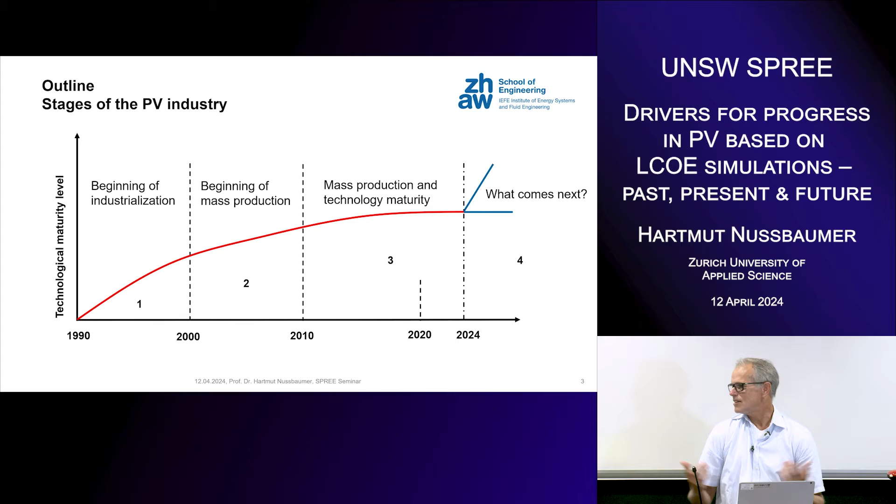I start from a retro perspective, and then I take a look into the future. For this, you see my outline. I divided the time into 4 different periods. The first period was in the 90s, when I was starting my career in photovoltaics also - that was the time of the beginning of industrialization. Then the next decade, from 2000 to 2010, was the beginning of mass production, later followed by a period which I name mass production and technology maturity. And the question is, of course, what comes next? Is it a disruptive change, or what will we see? We will discuss it.

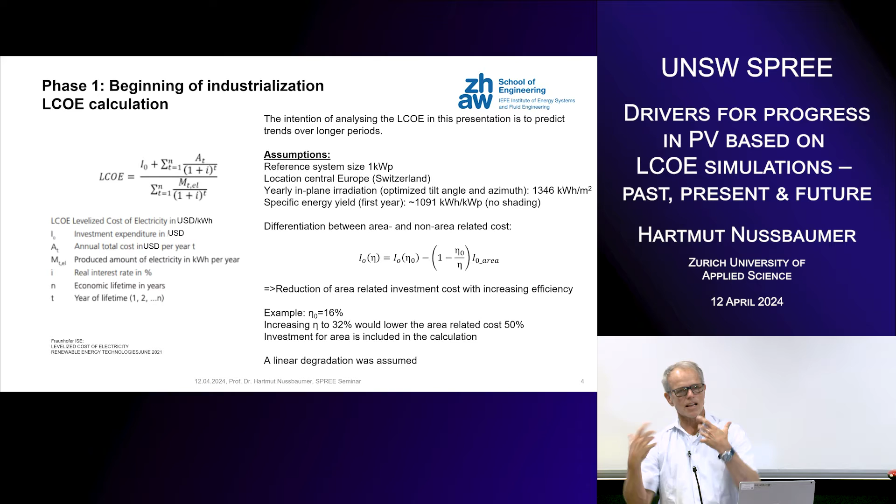So the levelized cost of energy, how I calculated it, is using just the standard formula, where you sum up all the costs of your photovoltaic system during the lifetime, divided by the total energy yield over the lifetime of the system. The yearly cost in the future is discounted by an interest rate, as well as the energy yields in the future, which are also discounted by an interest rate. That comes from the thinking that electricity has a kind of monetary value, which is discounted in the future.

I would like to mention that my intention here is to use this tool to predict trends over longer periods. So it's not the intention to predict the most precise levelized cost of energy for a certain time, for a certain location or so. That is not my objective here.

For this reason, I took some assumptions. I take a reference system, 1 kilowatt peak size, just for reference, location Central Europe, Switzerland, with a yearly in-plane irradiation of 1,346 kilowatt hours per meter square, giving a specific energy yield of 1,091 kilowatt hours per kilowatt peak, which relates to south-facing modules in central Switzerland.

Then I differentiated between area and non-area related costs, in order to reduce the cost when the efficiency is increasing. So if the efficiency of the modules increases, I need less area, less subconstruction and so on. This is shown in this formula here I've used. Just an example, if I would have a cell efficiency of 16% and I would increase it to 32%, that will decrease the area related cost by 50%.

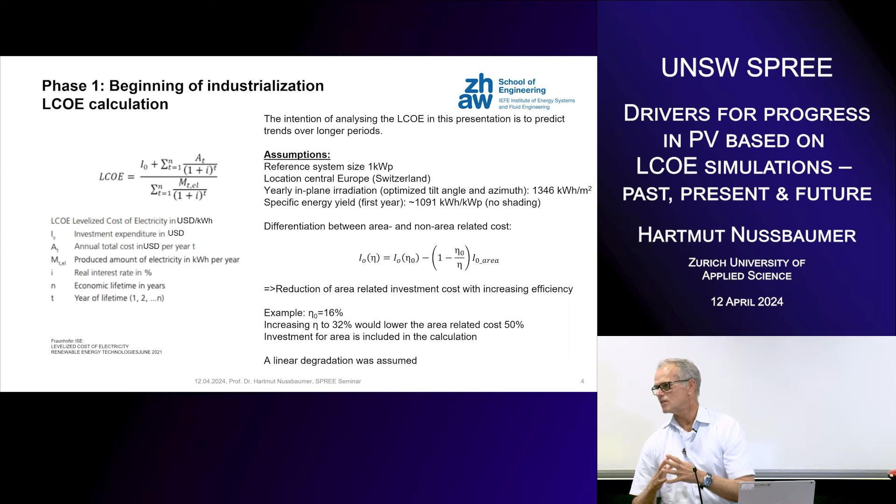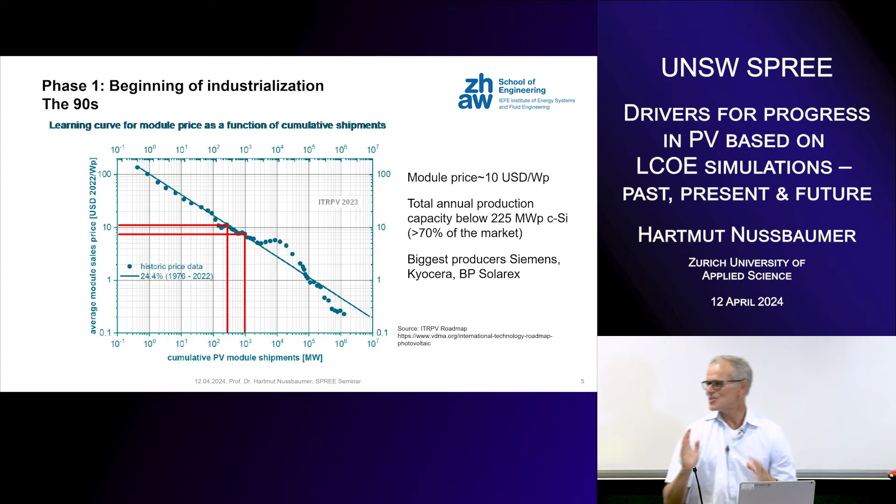So totally different to what we have now. The total annual production at that time was 225 megawatt for crystalline silicon, representing about 70% of the market. The biggest players were like Siemens, Kyocera, BP Solarex, and so on - all around 30 megawatt at the end of this time period. I myself was working at Eurosolare, one of the biggest players at that time, and it was like 6 megawatt per year output. So just to get a feeling, it's a totally different story.

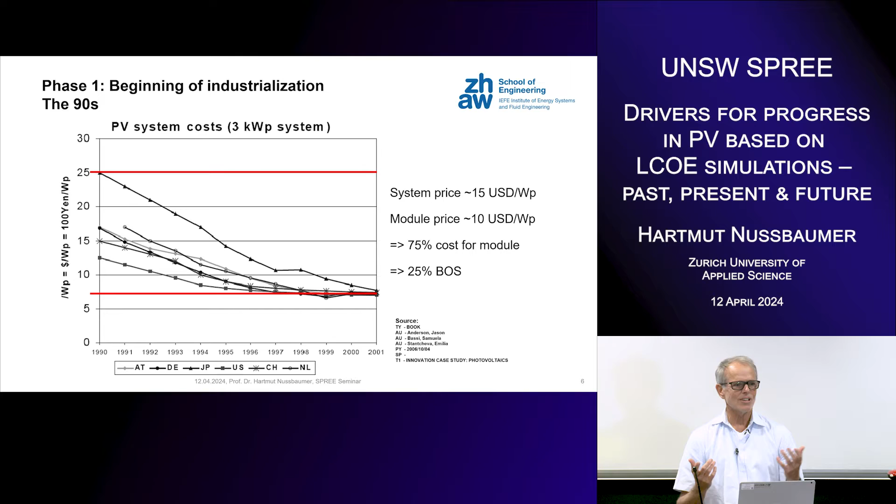And then I wanted to see what kind of system costs we had at that time. I found a publication on that. Of course, during this decade there is a huge variation in price, but I took an average of $15 per watt peak, taking into account this $10 per watt peak for the module. So that would represent like 75% for the module and 25% for the balance of system for the rest of the system.

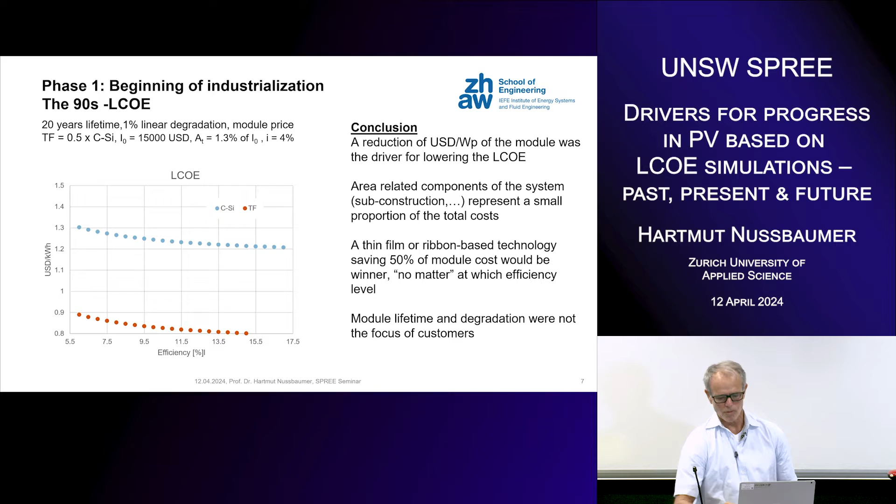They were really a small part. So a thin film technology reducing the price by 50% in US dollar per watt peak, no matter what efficiency, I would say it would be a breakthrough at that time. Module lifetime and degradation was not very much a focus for customers at that time. If we just look back, what was the technology at that time?

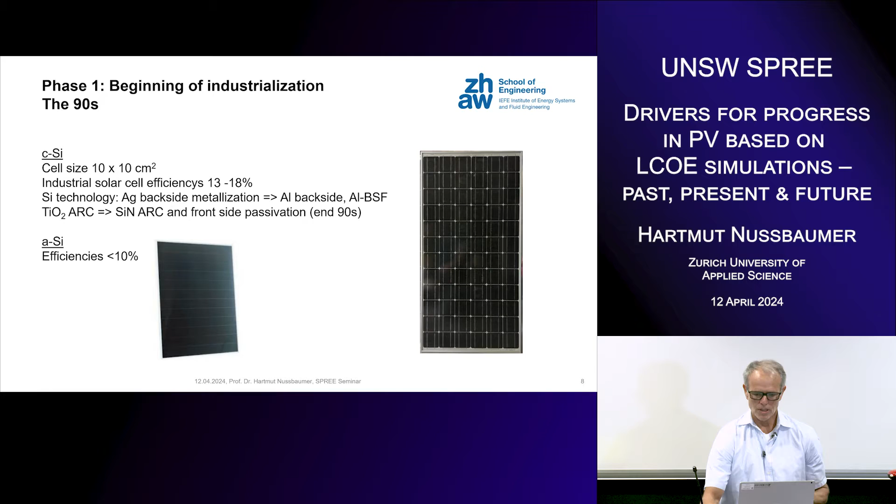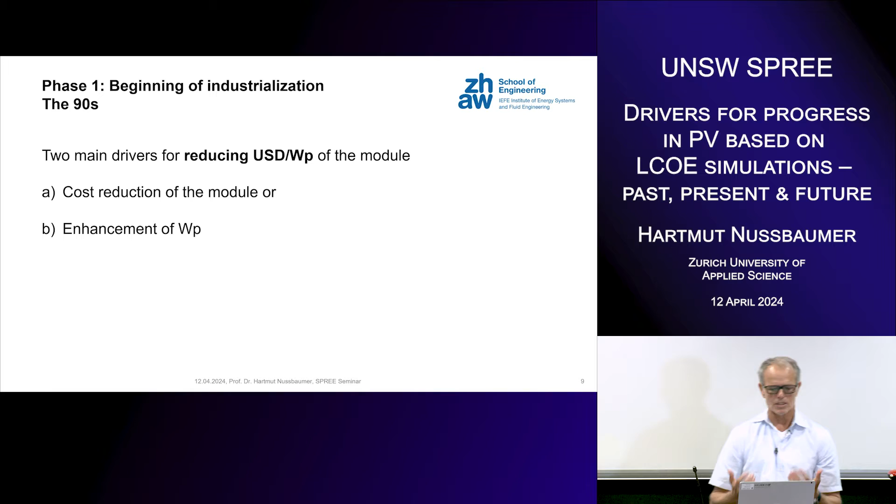And then for the amorphous silicon technology, that was still far below 10%. So that was the situation. The major focus was US dollar per watt peak needs to be decreased - that was the main goal. So we have two possibilities: cost reduction or enhancement of the power output, increasing efficiency respectively. So what were the topics then?

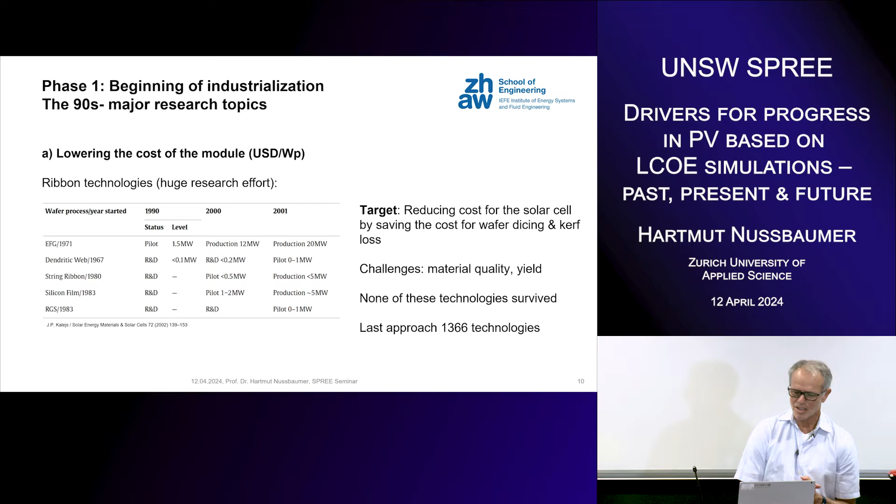There was a huge effort in the 90s for these kind of ribbon technologies. No one remembers it anymore. It's clear, we make monocrystalline silicon ribbons - nobody talks about ribbons anymore. But that was a huge thing at that time, because substituting the costly wafer with a ribbon would drastically reduce the cost. There was all these kinds of technology - EFG, dendritic web, and all kinds of things. And the challenge was always material quality, yield, and at the end, as we know, none of these technologies survived. The last approach was the technology from 1366, which I was in contact with them, but even they disappeared with this kind of approach.

Also, technology-wise, there was a change from titanium dioxide to silicon nitride. Hydrogen passivation was a big step. There was discussion about direct plasma versus remote plasma, and the fight between Centrotherm and Roth & Rau. Aluminum back surface field was optimized with the pastes, and some pastes were always better than others.

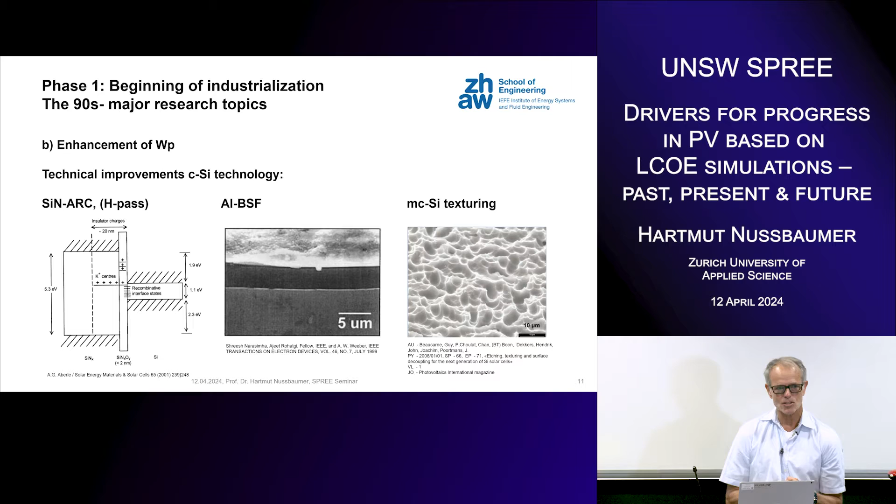I think a big step towards multicrystalline silicon was the availability of a texturing process based on acidic texturing. That was a real push for the multicrystalline technology.

Even in the 90s, there were already advanced technologies like the buried contact solar cell, invented by Stuart Wenham and Martin Green in the 80s here at the University of New South Wales. Great technology—they even used copper contacts at that time.

The modules performed great in the field. They used a heavy diffusion for these buried contacts in order to prevent the diffusion of copper into the silicon, and also LPCVD anti-reflective coating, which resulted in production efficiencies above 18%. It was produced by BP Solar and later BP Solarex with the Saturn solar cell.

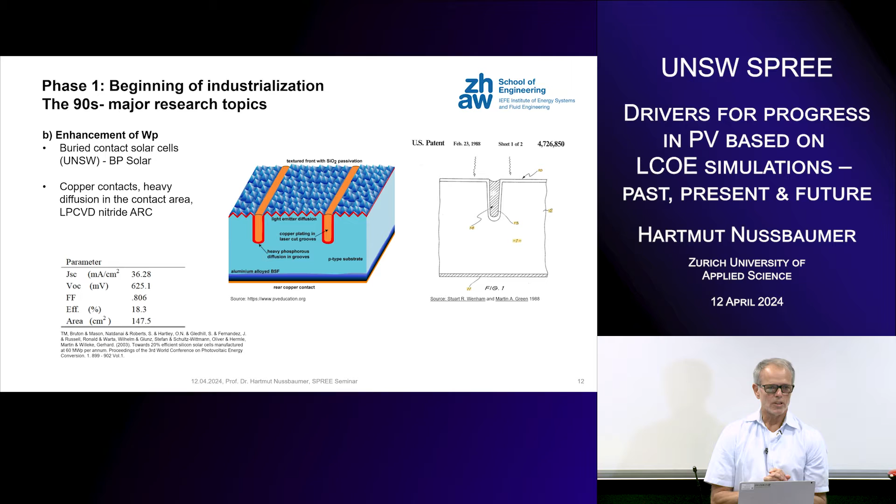Very nice thing. Then coming to the next decade, there was again a huge drop in the levelized cost of energy and in the module price, from $7 US to below $1 per watt peak. For my calculations, I used a price for the crystalline silicon system of 4,000 to 5,000 US dollars.

And for thin film, 3,000 — I really made a big step again for thin film to see what that means. I used for the annual cost 1% of the total investment costs, an interest rate of 4%, and a yearly degradation of 1%.

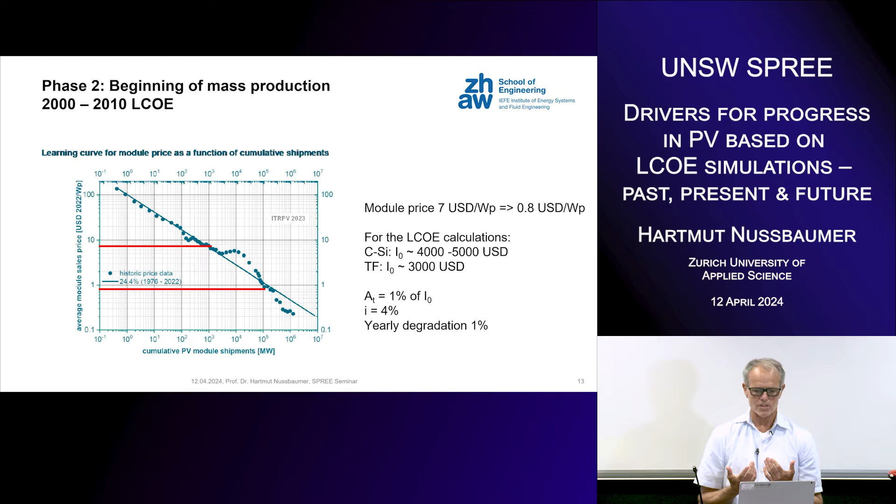So if we look at what comes out here, you see again the levelized cost of energy as a function of the efficiency. First, let's have a look at the thin film, mainly amorphous silicon technology. Using a 20-year lifetime, there is really a huge gap if you can produce these thin film technologies at much lower cost, which is the idea behind it.

However, interestingly, if I use only a 10-year lifetime, it doesn't work — the levelized cost explodes, because we go from this curve to that curve. Interestingly, if you looked at the data sheets of these amorphous silicon technologies at that time, they didn't give a guarantee of 20 years. The guarantee was only 10 years. So, in principle, they faced this curve here.

But nevertheless, that was not so much in the mind of the people. They were really thinking, wow, that's a huge opportunity to realize these lower costs compared to crystalline silicon. And that was the start of the hype in amorphous silicon with Oerlikon and Applied Materials, and of course also the cadmium telluride technology from First Solar.

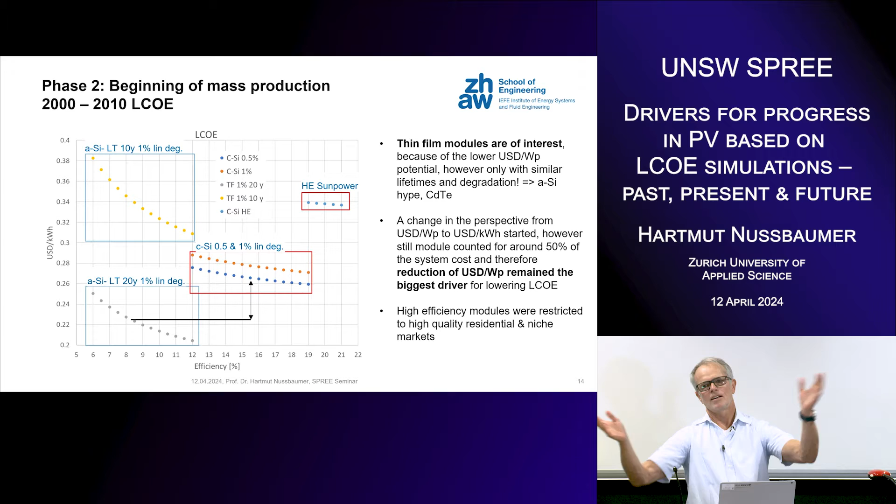What we also see here, if I use higher cost for SunPower technology with higher efficiency, it results in higher LCOE values. These kinds of products were mainly used for the residential market or high-quality niche markets where you needed high efficiency, not for the utility-scale market.

So in this phase, 2000 to 2010, a very important thing happened in 2000: the Renewable Energy Source Act in Germany passed through. That gave customers favorable loans, but very importantly, fixed feed-in tariffs for 20 years.

So that first came into people's minds — 20 years! I have a time span of 20 years where my system should work. That was the start of this 20-year discussion, I think, in 2000. So it gave a strong market push.

And then the module lifetime came into the discussion — what is the lifetime of the module? This push also resulted in production sites in Europe, mainly in Germany: Q-Cells, Solar World. It was a huge hype at that time. They were the world market leaders at that time, and you know the story how it ends.

So the cell size changed from 12.5 by 12.5 to 15.6 by 15.6. That was a standard for a long time.

And the efficiencies were around 16 up to the high end 22.4% in production at SunPower in 2007, mass production of this kind of IBC back-contacted solar cell.

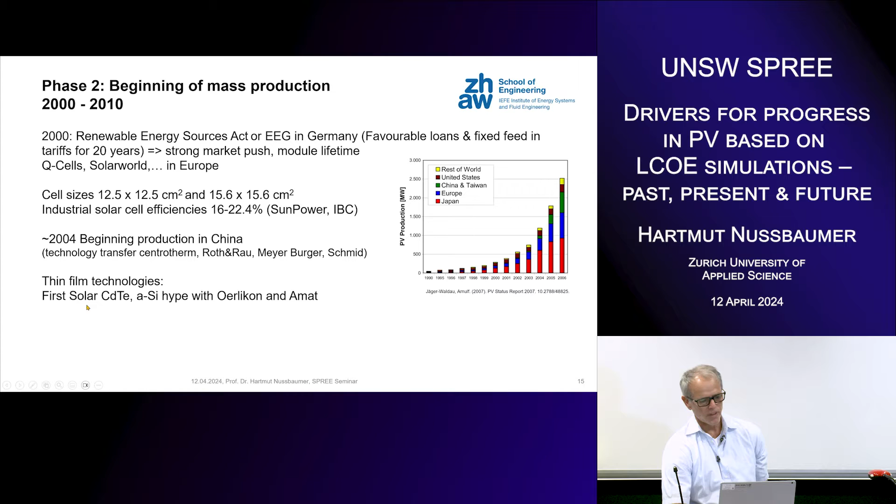And at the end, China took over the lead, you can say, in production capacities. And thin film technologies, as I already mentioned, there was first solar with cadmium telluride and this hype with amorphous silicon with Oerlikon and Applied Materials.

So what have been the technology trends there? I think the main reduction of this US dollar per watt peak was due to the increased productivity. It was mainly the aluminum back surface field solar cell standard, and there had been some approaches to increase the efficiency. I remember very well the selective emitters, all kinds of different selective emitters. This was the one I show here, the etch-back emitter from Schmid, but there were lots of technologies.

But at the end, I would say the most important thing was the improvement of the pastes and the fine line printing. This really pushed the technology enormously. So that was the main thing. There was also laser opening of the antireflective coating with plating developed at RENA. We ended up having modules where the whole cycle was passed through. The technology was ready, but no one took it over. So it's been like that since.

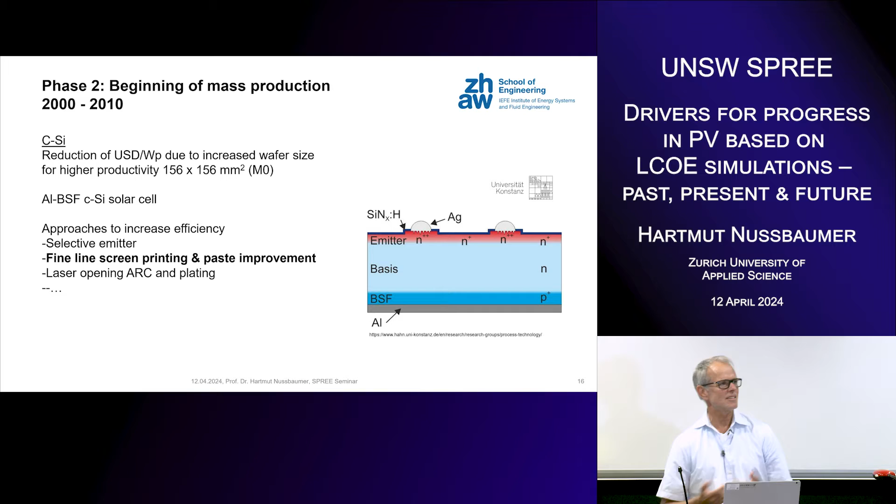So we can think about what kind of alarm this brings to us when we look at the silver consumption in a terawatt scenario, which we will face in the future. Then hopefully we will be more prepared at this time and not see these price increases.

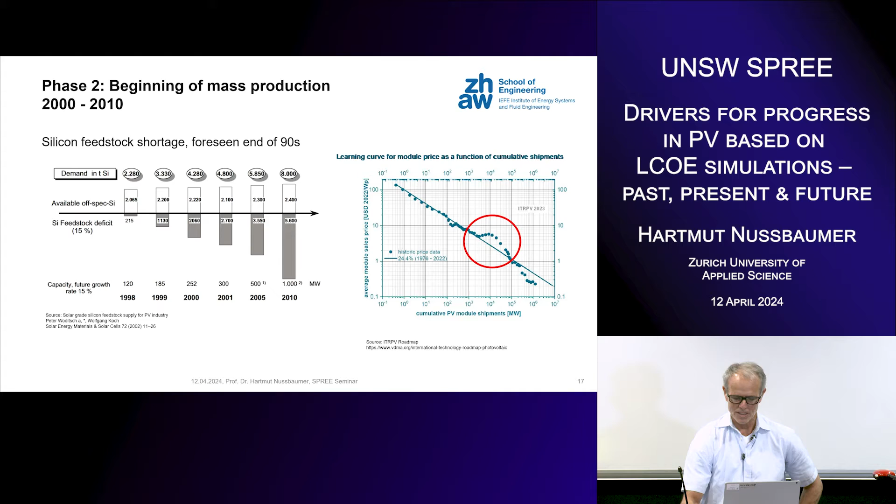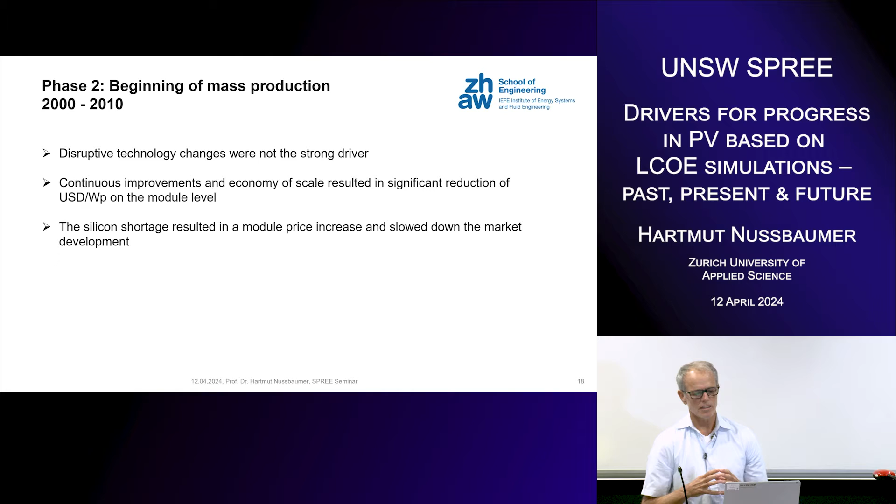So summing up, to summarize this decade: the driver was not a disruptive technology change at that time for decreasing the price of the modules. It was continuous improvement and economy of scale which resulted in this significant reduction of module prices. And we have seen this silicon shortage which resulted in a module price increase and slowed down the market development.

So coming to the third period of time, this mass production and technology maturity, which is 2010 in my view, until now. So there is again a huge price drop in modules. You see we are now in this period below $1 per watt peak, and currently the market price is 11 cents per watt peak for wholesale sellers, of course a little bit depending on technology, which is phenomenal.

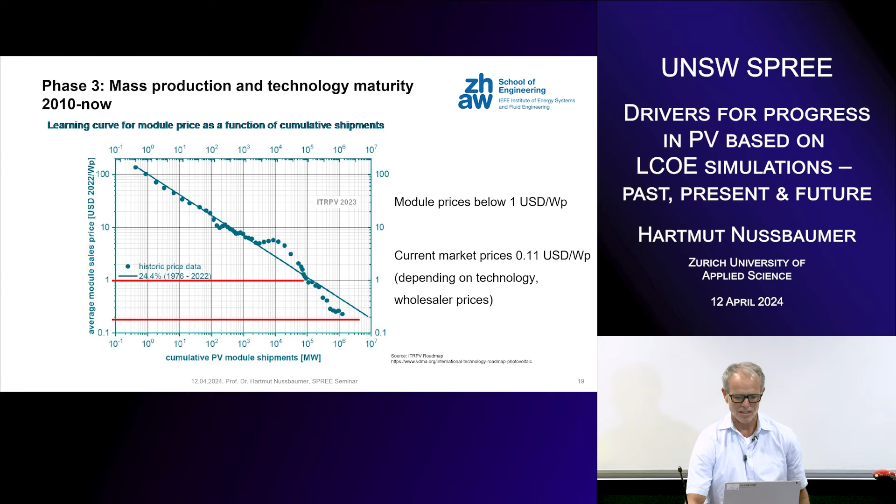It's really amazing. Just to get an idea what that means in system costs, I have here a publication from Fraunhofer ISE from the year 2021, and for a large rooftop they say an average price of 1,120 euro per kilowatt peak, and I took, as we are now in 2024, $750 per kilowatt peak, which relates a bit to this low value in 2021 for a large rooftop.

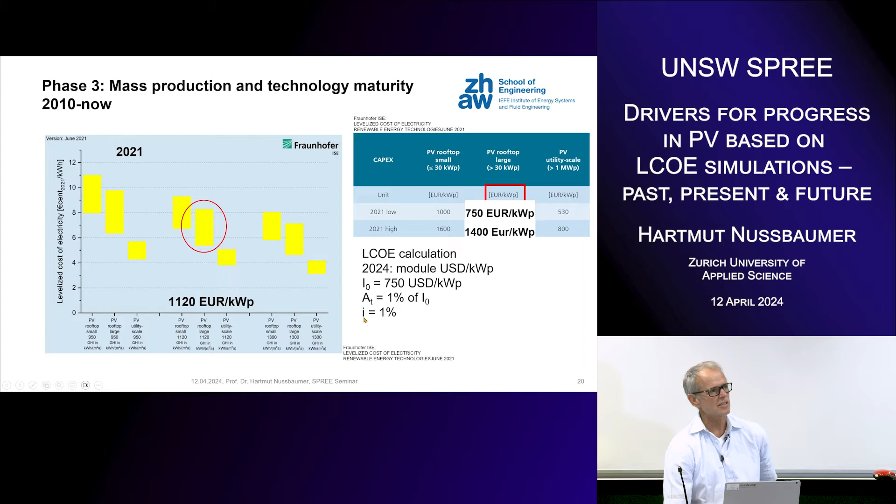But it is not my intention to predict the most precise LCOE anyway. So again, I've used 1% yearly cost of the investment cost and a low interest rate of only 1%. So showing now, I show the levelized cost of energy as a function of efficiency again.

Let's draw our attention first to this section in 2010. So assuming a 40% lower cost for the thin film, you see, even if you have 40% lower cost for the thin film, you need a kind of threshold efficiency to compete with crystalline silicon. You see, it's about 11% efficiency. If you're not above 11%, you cannot compete with crystalline silicon.

And it really was like this. They fought over it. There was a huge thing with Applied Materials and Oerlikon, and they pushed and invested a lot of money to get over this threshold of 11-12% for module efficiency. But they were too slow. And then the window of opportunity collapsed, and crystalline silicon, with large economy of scale, went down in price, and amorphous silicon disappeared, except for niche markets.

So that was the story, and you can easily see it here. It's just, if this is going down, then there's no opportunity anymore for amorphous silicon.

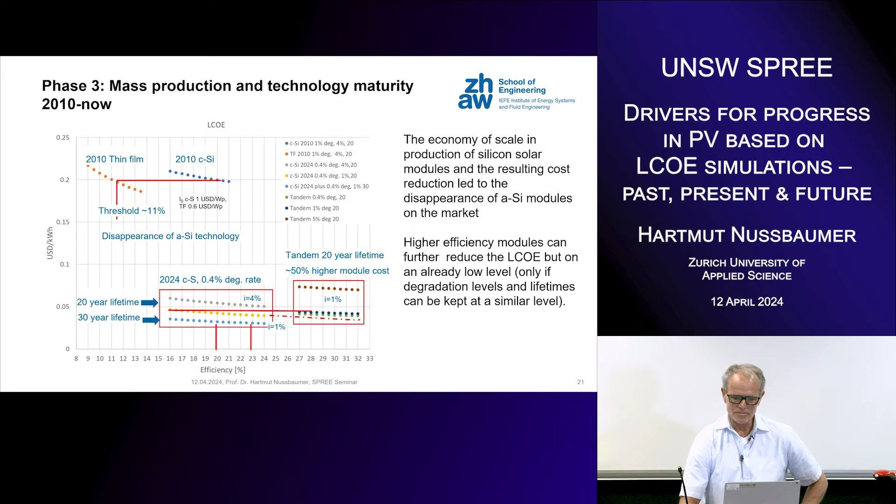So, but if we look at the degradation, if these new devices would have higher degradation rates, then they are not competitive anymore. So this is quite interesting.

And then I went more in detail with this. So I compare here crystalline silicon, all of them 20 years lifetime, interest rate all 1%. 23% efficient crystalline silicon and 50% higher cost for the tandem. You see, they have similar LCOEs. There's no benefit.

And so now it's very interesting, I think. Even if I say that, thanks to Nathan, the discussion with Nathan here in the auditorium, even if we think that the price per area remains constant, so if I increase the efficiency in the module, I need less area in the module, so I could decrease the price even, I could decrease in this scenario the price in US dollar per watt peak for the tandem. In this scenario, which I think is a hard challenge, and this will never happen, it's the same price, it means that you do not add any cost.

So you see, okay, even in this, let's say, wonderful scenario for tandems, a miracle scenario you could say, you see an effect, of course, in LCOE because you have higher efficiency. Clear, you go from 23 to 32%. Yeah, okay, you have an effect.

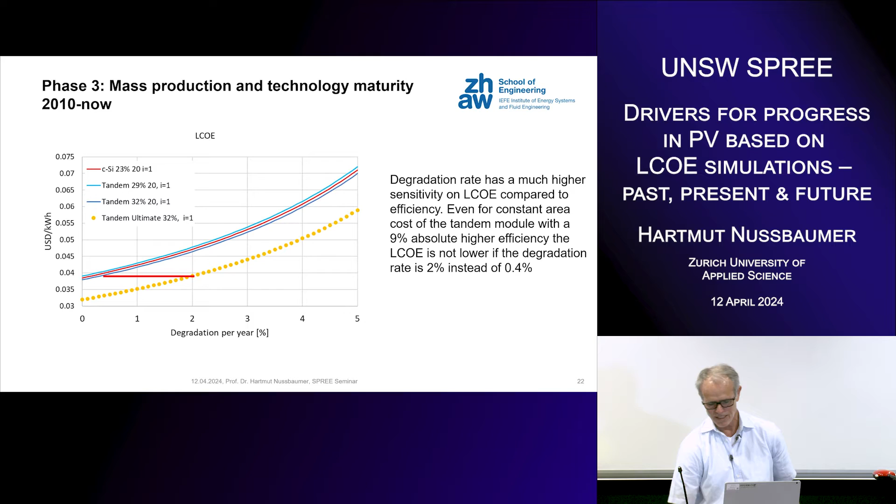So, and then I even zoomed in again and said, okay, what can we extract? So you see here, I assume all technologies having the same US dollar per watt peak, so the crystalline silicon and the tandems have the same US dollar, this is an assumption. And then what is interesting here, if you compare a 22% module crystalline silicon with a 32% tandem, this interestingly gives a difference of 0.5 cent per kilowatt hour.

Keep this in mind. So this is for instance for 1% here, this is 0.5 cent per kilowatt hour, and interestingly this 1% degradation here gives the same 0.5 cent per kilowatt hour. So according to my calculations, what I did, 10% efficiency gain absolute can be lost by a 1% plus in degradation. So think about it, it's amazing.

For me, the tandem technology can only be competitive when achieving similar low degradation rates compared to the crystalline silicon technology. Of course, there is a kind of window, you can say. An efficiency increase of about 6% would tolerate a 0.7% higher degradation. But it's not so much, I think.

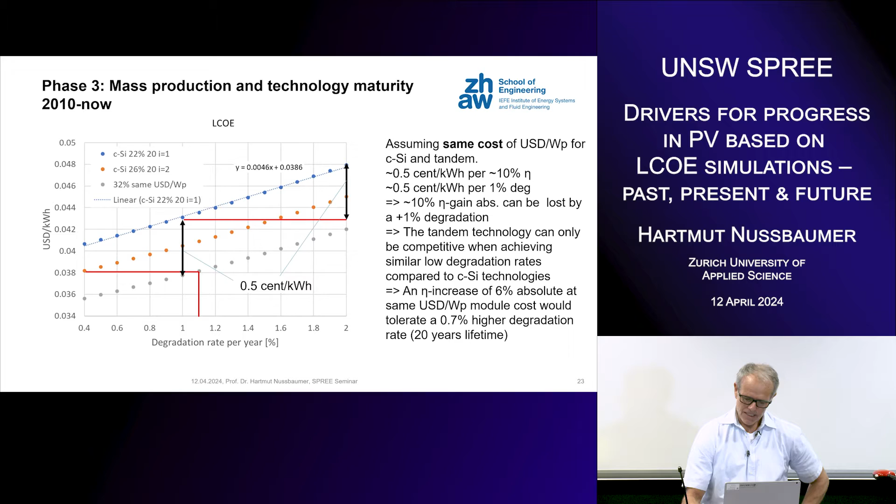So there are, of course, other studies from Peters et al. in 2021. He calculated a correspondence of 5.2% efficiency to 1% degradation. So from 2021 to now, we're getting even more sensitive to degradation because the prices are much lower. There was this paper from Nathan Chang here in the auditorium et al., and he calculated what is the potential cost you can add in order to be at the same level of LCOE.

Since the prices already changed dramatically, I think the situation is getting more difficult for tandems at the moment.

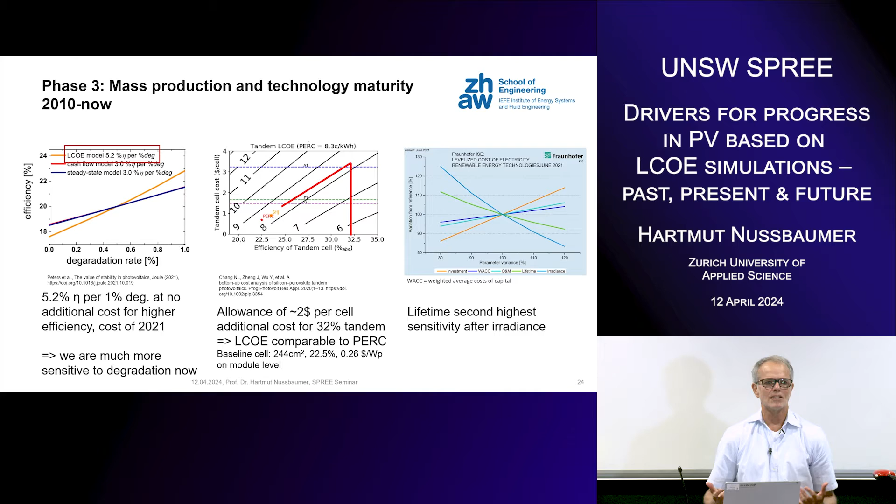For completeness, on the right side is a levelized cost of electricity, LCOE, analysis from Fraunhofer ISE showing the sensitivity. Interestingly, lifetime has the second highest sensitivity, but they didn't study degradation. There was no sensitivity analysis on degradation yet.

So what is the status now? If I take a technology roadmap of one tier-one player, like Jinko, I think they are all similar. You can take each technology roadmap of the tier ones, they are very similar, except that some like Huasun have heterojunction, but the rest mostly have TOPCon, and then they go to tandems. We are in 2024, and next there will be a fully passivated TOPCon technology, and then the next step is tandem because there's no room for improvement anymore.

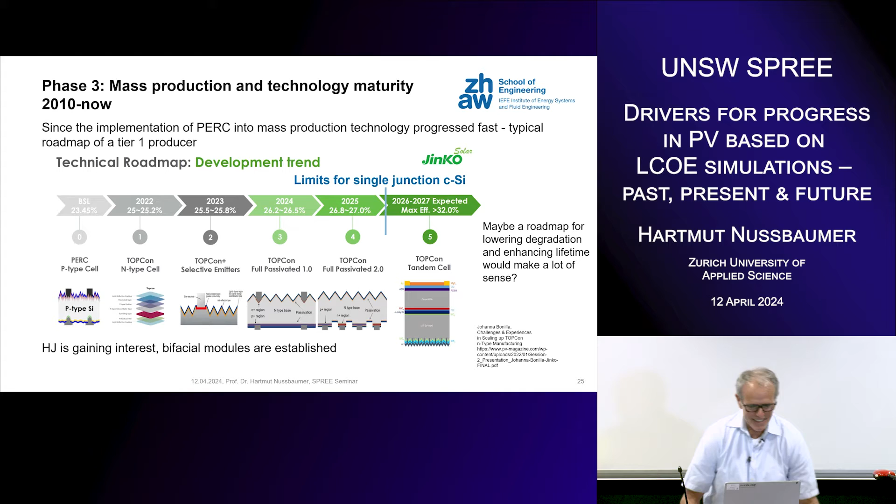Question is, maybe they should better have a roadmap for lowering degradation and enhancing lifetime instead of thinking about tandems, because tandems - well, we can discuss later. So the question is, what comes next? We are really, with the crystalline single junction technology, reaching the full potential.

In some regions, PV is the cheapest source of electricity. Degradation and lifetime of the modules, as we've seen, are of high sensitivity for LCOE. Subconstruction, labor cost for installation, and cost for area represent a more and more increasing share of the cost.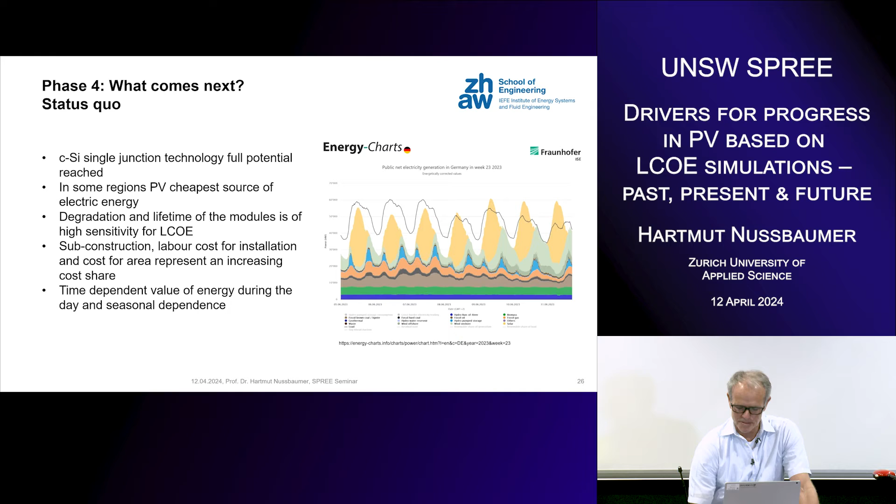So what comes next? One direction, obviously - we've seen the roadmaps - everyone goes to higher efficiencies. Tandems are on the road. Multi-junction solar cells, up and down conversion - these are the possibilities to increase efficiency, which is good, I think.

The target is, of course, lowering LCOE by increasing the energy output, efficiency respectively, or even theoretically - which I don't believe at the moment - that you can reduce the US dollar per watt peak with these tandem technologies. I think this is still a big challenge.

If you think about how long it took to have mass production of crystalline silicon, all the machinery and these kinds of things to run with this extremely high yield - you always have to think that if you make a new technology, you need yields above 99%. It is really a big challenge.

The important thing is LCOE is lowered only if you have the same long-term stability, lifetime, low degradation rates - otherwise it will not be bankable. So how long will that take? I would not buy such a system to put on my house at the moment, because you never know 10 years from now. So this is one direction.

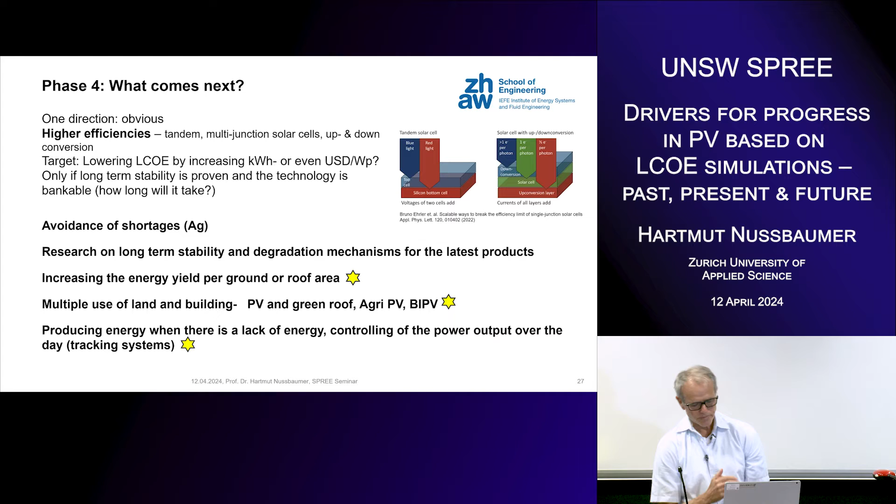from my research at the Zurich University of Applied Sciences. First, if we want to increase the energy yield per ground area, the typical setup of a roof system is

like having an east-west oriented system, low tilt angle, ground cover ratio maximized close to 100%. The question is, is there a way to further increase the energy yield per area? You first think, how could it be? Because it's completely covered, you cannot get more out of it.

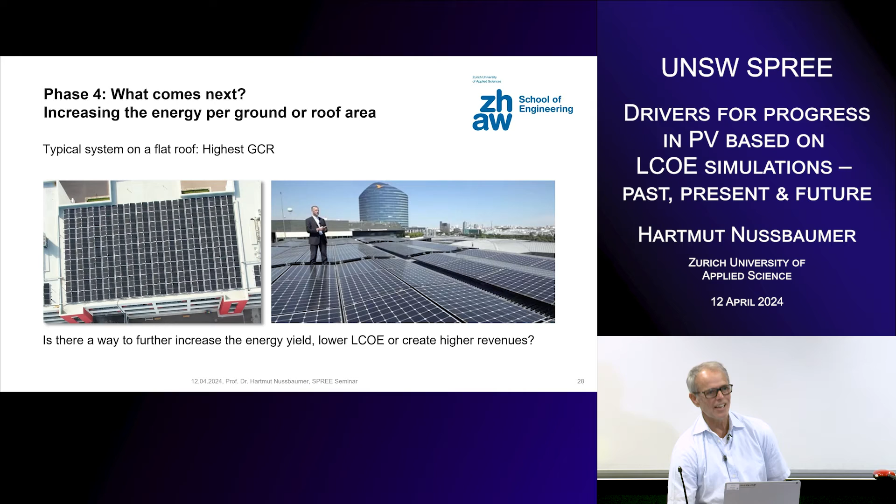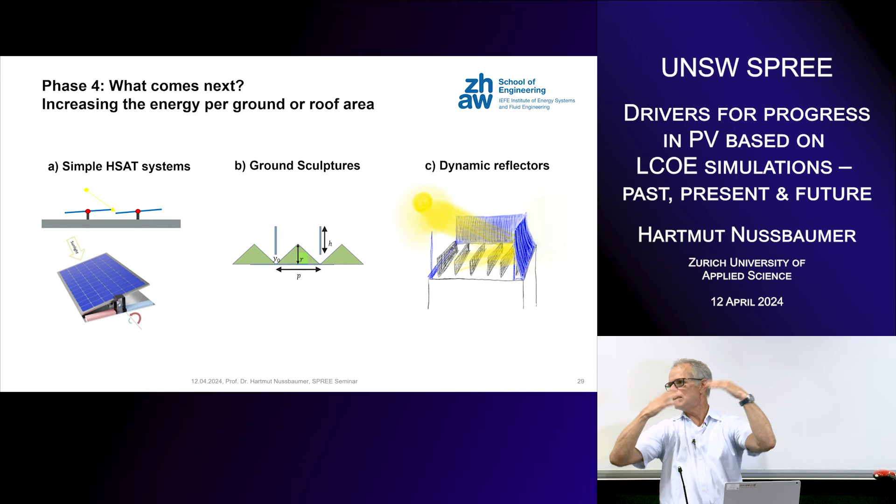But there are some chances. We are currently investigating simple horizontal axis tracking systems with very high ground cover ratios, like 90% or even higher, just that they really are in contact, which makes the first thought no sense, because if they contact and you tilt them, you immediately get self-shading.

But we will see what comes out. Another thing is using reflecting elements in between, like for instance vertically installed bifacial modules. What can that help for? Is that something we should think about?

The second one is an idea which came up recently from us, not published yet. It will hopefully be published at the EU PVSEC, using dynamic reflectors. The idea is to have a reflecting wall which you can use weather dependent or not. If the weather is good, you put up your wall and increase the irradiance. Using these reflectors isn't a new idea, but using them dynamically is maybe something new.

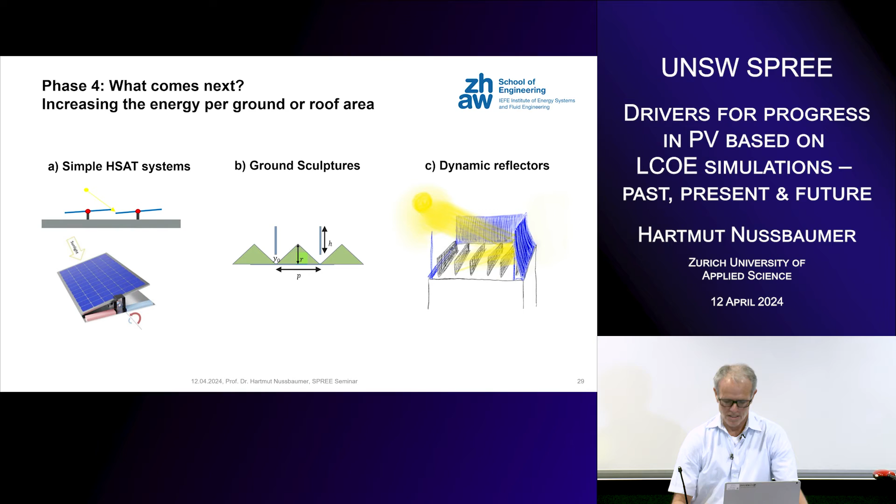So coming back to the first topic, horizontal axis tracking on roofs. We made a power simulation using a large field and bifacial modules on the tracking system. We simulated a tilt angle of only 10 degrees, making a kind of flip-flop system, plus 10 degrees, minus 10 degrees. That's all. Is there an effect?

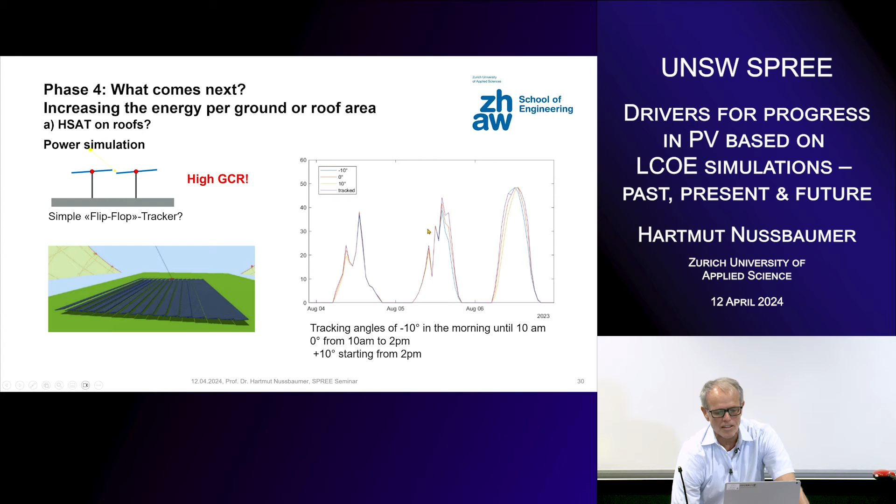You see, there is an effect. It's small, but it's there. You can see if you compare the lines. Maybe it's not a very good plot here, but to sum up, if you have a ground cover ratio of 100% and compare this flip-flop with a 10 degree east-west oriented system, it gives an increase by 11.5%.

But now you have to think about it, you're using bifacial modules, put at a specific height, and you have to consider what is the benefit of the bifaciality compared to the east-west reference. Taking this into account, at the end there is a gain potential according to the simulation of 5%. You think 5%, not a lot, but it's something.

So if you have 5% more energy yield, we can think about what this relates to in potential investment costs, so that we can realize this kind of system.

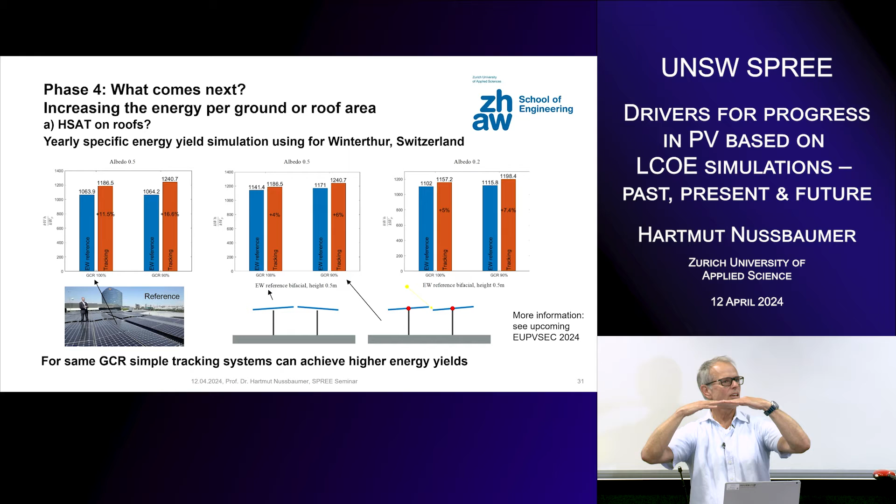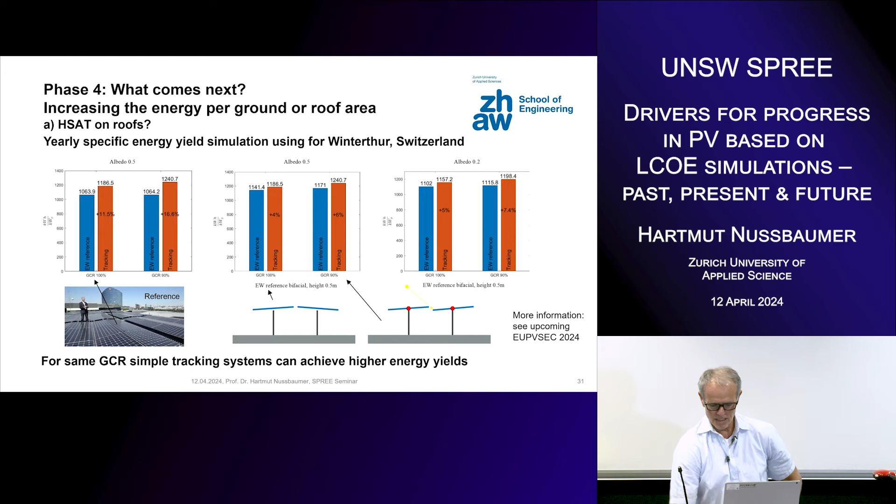There are other benefits if you have this kind of simple tracking system. In the winter you can just flip it and get rid of the snow, for instance. In Switzerland this is important - in January there's nearly no output from PV systems because they're all covered with snow. Also, if you can flip them, you can make maintenance of your modules easier, and pack them maybe even closer together. There are all kinds of other beneficial things in this new technology.

So the second thing we looked at are these reflecting ground sculpting elements. There was an idea also published by Khan et al. He published that using these kind of elements in between vertical bifacial modules would give a higher annual energy yield per area, even compared to monofacial south-oriented ones.

But he did some tricks, I would say, which are okay - I will explain.

First of all, he assumed for the south-oriented ones 10% soiling, which is, to be honest, a little bit too much. And the second thing, which he didn't write in his paper but told me talking to him, is that he assumed a ground cover ratio of 50% for the monofacial system in order to prevent self-shading. But if you only have 50% ground cover ratio, you're not competitive, for instance, to an east-west oriented system with ground cover ratio close to 100%.

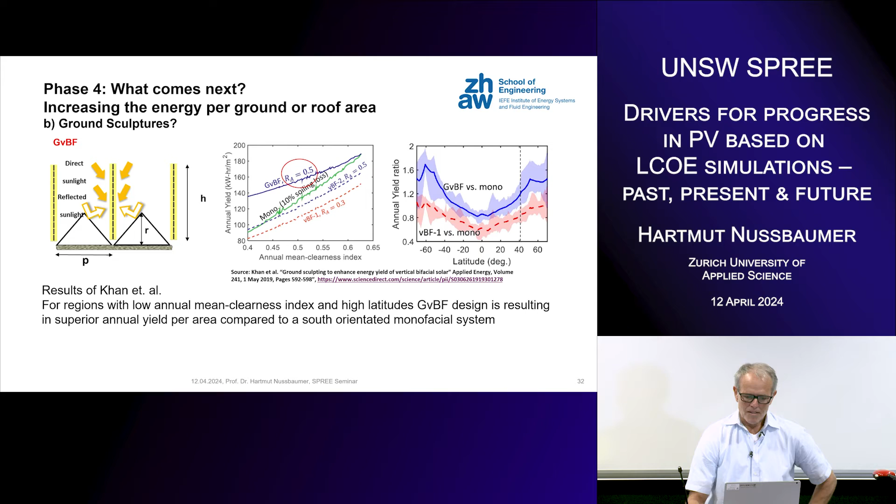So interestingly, what we found when we made measurements on this is that for overcast days, we've seen even an increase of the energy yield for some days using these kinds of reflecting structures.

This is compared to a monofacial system without self-shading. So even if we don't count the area, but only look at the kilowatt hours output per watt peak, there was a higher energy outcome for this kind of structure. This is interesting, and also interestingly, on overcast situations there's a lack of energy in the future, so this kind of approach could be of interest.

We've also made first measurements using dynamic reflectors. Of course it depends a bit on the size of the reflector compared to the size of the system. If you have a huge roof and put some 2-meter wall somewhere on the border, it doesn't count for much. But if it's a smaller system with a comparable size reflector, it really makes a difference. Our first measurements showed an effect of plus 30% energy yield for a certain day. So we have to analyze what sizes would be interesting, and so on, but think about it—putting a reflector might be cheaper than installing a system.

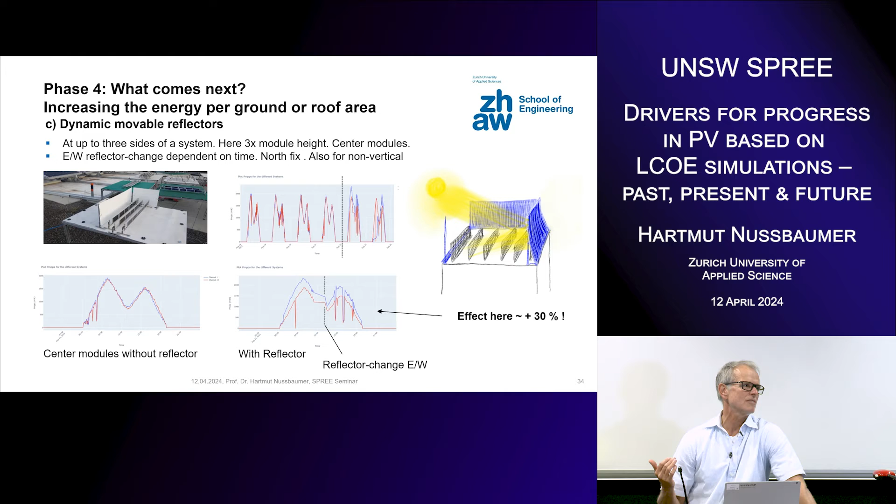That's the idea. Now I'm coming to the next thing, which is multiple use of land and building. We've dedicated time to develop and analyze systems where we combine green roofs with photovoltaic roofs. So what do you think—green roofs, why green roofs? Well, green roofs have some advantages.

They have the function of water retention. If there's a lot of rain and there's no green roof, the rain just goes into the canalization, and in Switzerland they really have to pay for that kind of water, so it's a cost factor. There's also additional building insulation, cooling of the building, air humidification, and so on, and it decreases urban heating and enhances biodiversity.

So if you want to combine this, the easiest thing is to say, okay, I have a PV system at one part of the roof, and the other part is a green roof. Easy—so that would look like this. But is this the best design? That's the question.

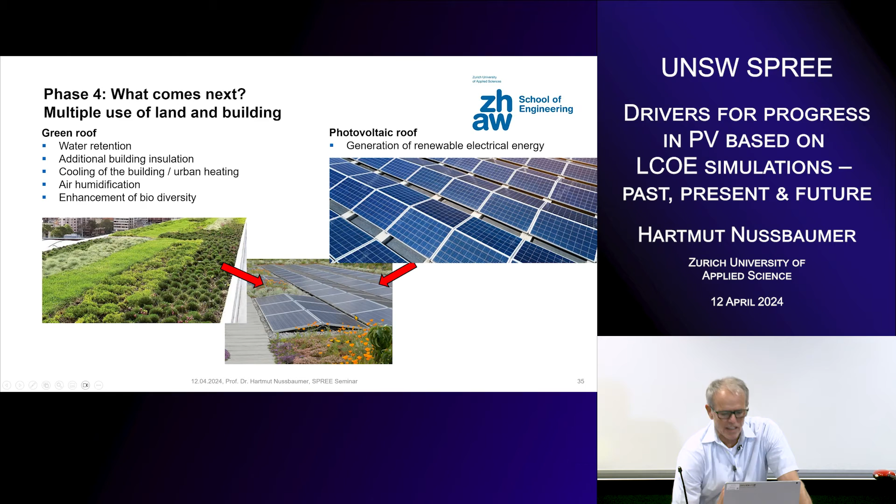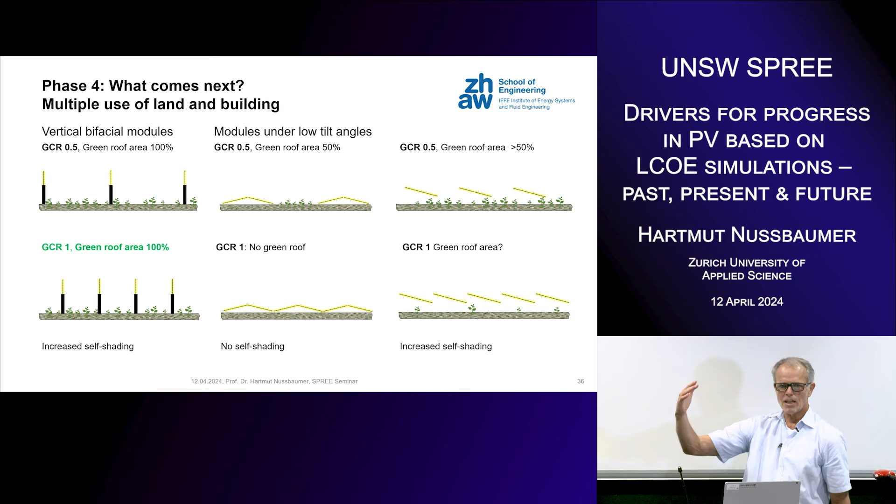So we compared vertically installed bifacial modules, standard east-west ones with low tilt angles, and, in our hemisphere, south-oriented modules with a certain distance to prevent self-shading and allow the green roof to grow underneath. There's a difference between all of these. If you look at the vertical one, the advantage is you can put your modules as close together as you want and still always have the green roof.

If you do this with the solution in the middle, at a ground cover ratio of 100%, you don't have a green roof anymore—you have to make a decision, green roof or PV. Or with the right-hand option, you could accept maybe 50% ground cover ratio, maybe a little more. But if you go too close together, you get self-shading first of all, and second, there will be no plants left below the panels because they don't get light.

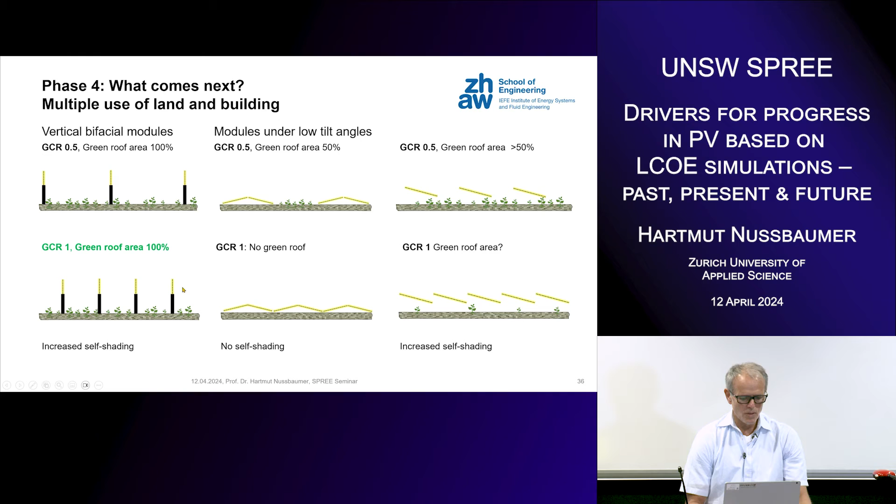So we were interested in thinking about what happens if we go for a high ground cover ratio. According to our analysis, these dense arrangements really make a lot of sense, even with self-shading—you can get close to the optimum energy yield while maintaining the full area of the green roof. So this is one good option for combining green roofs and photovoltaics.

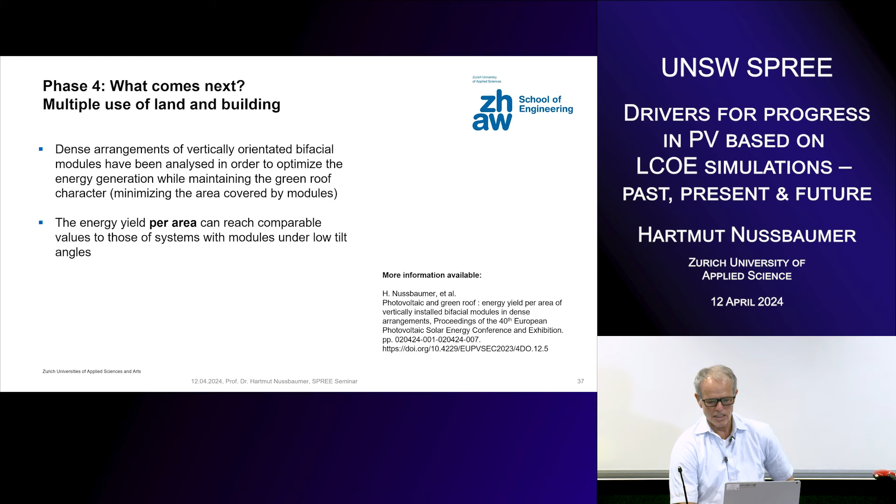And also the energy yield per area can reach comparable values of those systems using modules which are tilted and with a 50% ground cover ratio, and even a little bit more. So if you want more information, there was a publication at EU PV last year, much more detailed than I can report now.

So there's also this topic on agri-photovoltaics. It's a huge hype in Europe. For instance, in Italy, there will be no ground-mounted systems anymore, except in combination with agriculture. So I think this is really a very important topic in Europe.

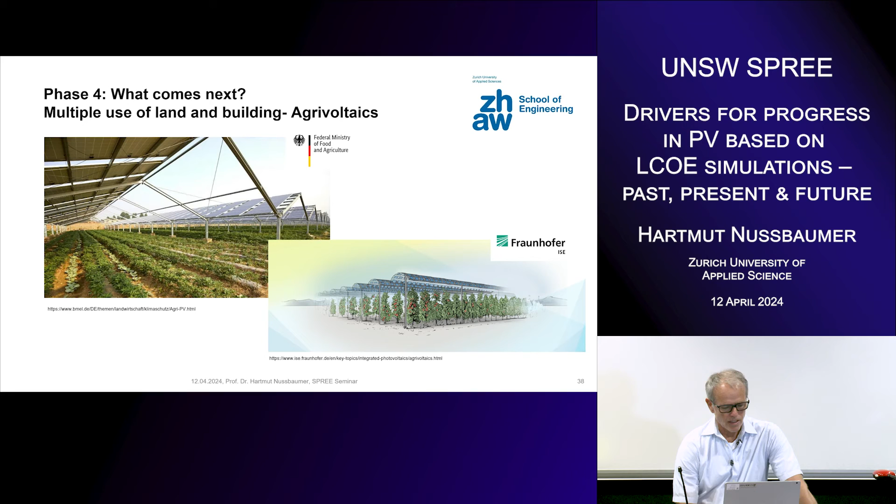And there are also solutions like from Next2Sun, using bifacial modules, and then there's enough space in between. This solution, using bifacial modules east-west oriented, has an additional advantage that you probably know.

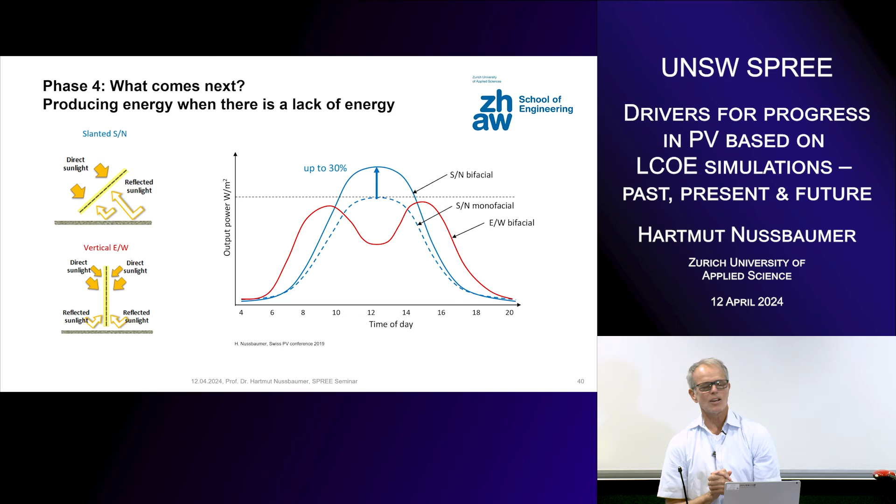The power distribution over a day is different compared to a south or north oriented system, depending on the hemisphere. You don't have your peak in the middle of the day. You have more two peaks, one in the morning and one in the afternoon, which is different from the graph I've shown, where you have the peak in the middle of the day. The prices you can get for this kind of energy in the future would probably be higher.

The latest topic is controlling the power output of the day. We have seen the tracking system. I think horizontal axis tracking could be a good use for this kind of controlling of the energy output. But concerning levelized cost of energy, I think they really compete with systems with very high ground coverage, which we do not see so often in the field. We often see these south or north-oriented systems, but east-west are not so common.

To summarize everything, LCOE analysis helps to predict future developments. However, LCOE alone cannot predict the whole range of developments, especially now. PV in combination with further utilization will be important. What we have seen, LCOE is very sensitive to degradation and system lifetime. Just to remind you, a 10% efficiency gain can be lost by just 1% added degradation.

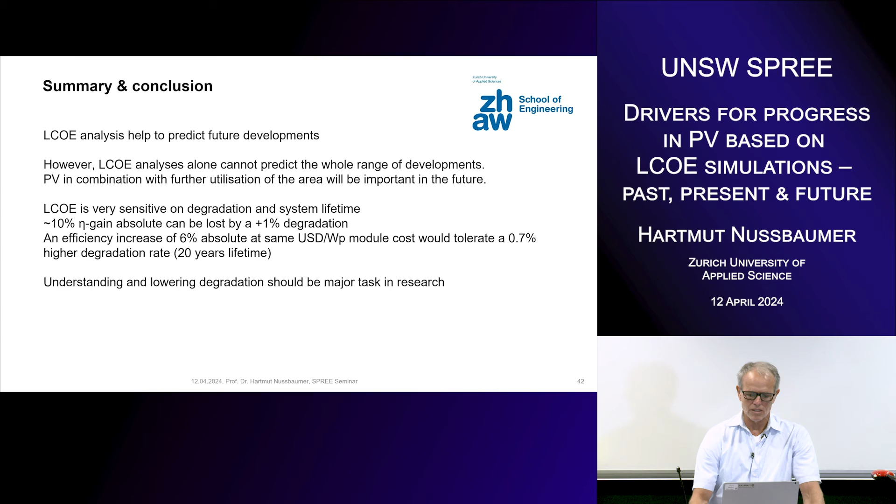And just this, what we figured out: a 6% absolute efficiency gain at the same US dollar per watt peak module cost would tolerate only 0.7% higher degradation rate, which is for a 20-year lifetime, and a 30-year lifetime would be even worse. So understanding and lowering degradation should be a major task in research.